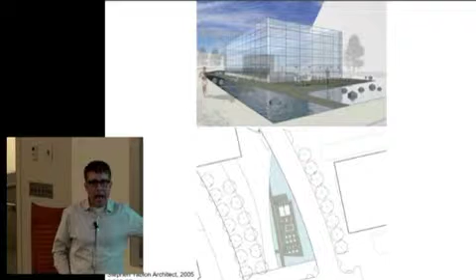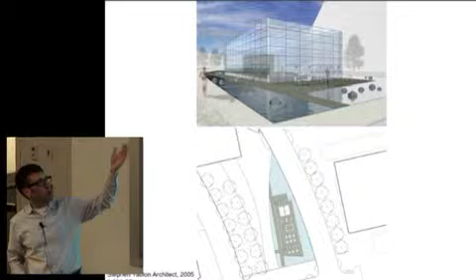That was without any client feedback—there was just a short brief and a site indicated on the Rose Kennedy Greenway. For reasons still a mystery to me—and our very own Peter Wiederspan submitted one of the proposals back in 2005—Steve Yablon and team were chosen for this glass box, a perfect glass cube that was transparent and light, sitting on this kind of metaphorical harbor.

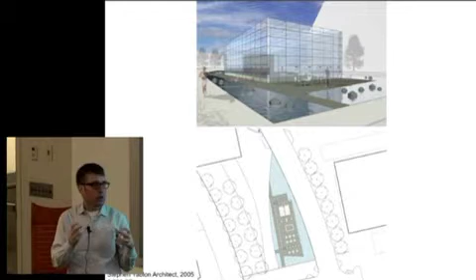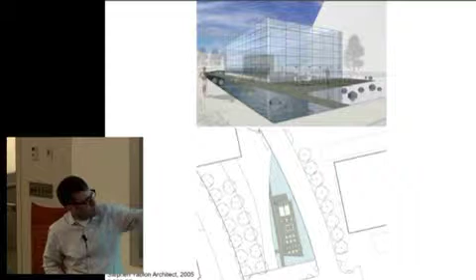In a way, it was the metaphor of going on an island to learn about the islands. Now there were a couple of problems with this. One, it would be very hard to keep the temperature in this building below 100 degrees in the summer because it's basically a greenhouse. Secondly, if you look at the floor plan, as an architect, there's room for a men's and women's bathroom and a couple of cafe tables.

So even though the image was compelling—which button do I? This one, here it is—at night it's totally cool, and it's got little TV screens.

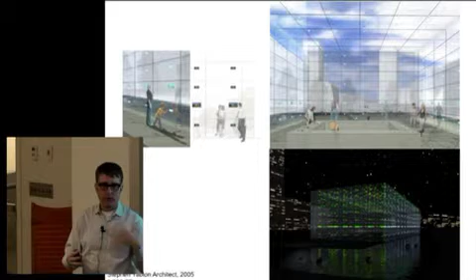It would be a beautiful thing. Because there was no involvement with stakeholders or a client, soon after architect Yablon was hired, the building changed and changed and changed to the point where nobody liked it. And unfortunately, Steve Yablon was fired because they were tired of flying him up from New York.

He was expensive, so they issued a new request for proposals to reset the whole thing. The only requirement, and it was a qualifications bid, not a design bid, was that you had to have an office within 15 miles of the site, because their only issue was they didn't want to pay for the train and airfare anymore. But they knew the process was going to be harder than they thought.

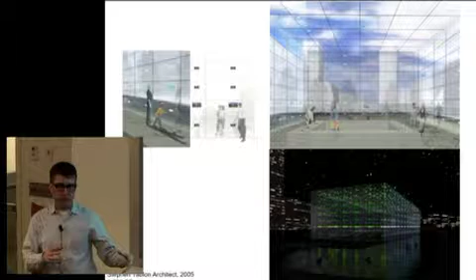So we applied as a firm, not with a design, but based on who was going to be on our team, what our qualifications were, and some observations we had about the project. We ended up being on a medium list of 27 firms, had to do a little more clarification of how we would run the job, and ended up being one of 4 finalists they interviewed.

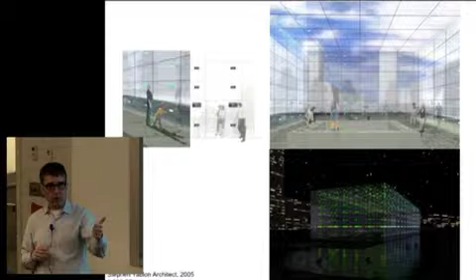The city interviewed us, the National Park Service, and the nonprofit, the Harbor Island Alliance, and then we won the project. I think we won because of my bio, because I was doing all this public agency work, and they realized what a messed up process this was going to be, since there were so many agencies that own this piece of land.

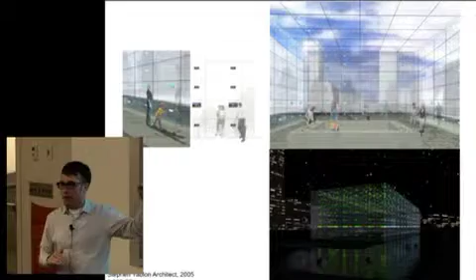It sits over the Big Dig, so the Federal Highway Administration has to approve the project. It's on the Rose Kennedy Greenway, so they have to approve it too. And the Boston Redevelopment Authority has to approve the project.

So they said, let's get the opposite of Steve Yablon from New York. Let's get Tim Love, who knows all of the public officials, so that there's a path to glory. I'm being a little cynical about myself, which is one of my default personality traits, but it's certainly one of the reasons why we got picked.

So what we proposed, which ties closely to George's theme this semester, is that rather than just be the architects and design the cool glass box, we were going to team with Reed Hilderbrand, a landscape architecture firm, to think about not just the building but the whole parcel in relationship to the Greenway, which is a park, and also IDEO, the design thinking think tank.

Have they been in here yet for your class? No, but we have people. But they could be. Continuum is here, right? No, but we've had people like that.

IDEO, for example, is doing a big project now for Sealy, the mattress company, to rethink the mattress. They were the original conceptualizers of the iPod and then the iPhone, so Steve Jobs often got them in early to think through what the new phone could be. We had some relationships with some people there.

So we said, you so screwed up your last process that we're not going to design a building for you until pretty late in the process. We're going to figure out what you want first, and then we'll design a building for you. So that was a little bit of our pitch.

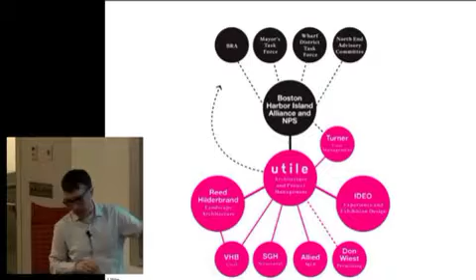So we had 3 preconceptions that we brought to the interview. One: people only go to the islands when the weather's nice, so you don't need an enclosed building, just have an open air thing, because nobody's coming to look for boat tickets when it's snowing out. The other problem with the first project was they blew the budget, and we knew if it was an open air building, we could actually meet the budget. So this was one: it should be a porch rather than a building. This is day one.

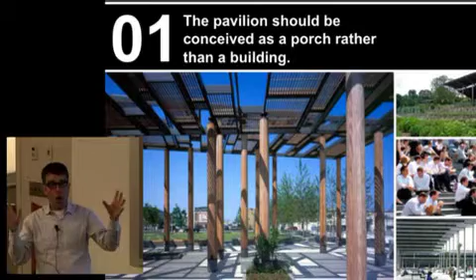Secondly, the pavilion shouldn't be an isolated thing. The Greenway had just been finished, and this thing should be part of the whole Greenway. It's a little bit Captain Obvious, but this is how you make a pitch.

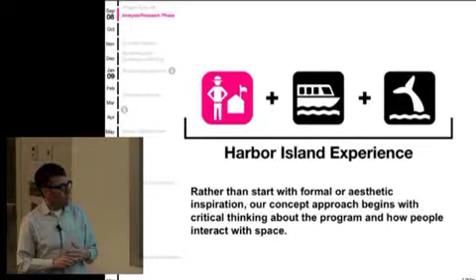And third, we were going to tie this pavilion deeply into the entire visitor experience. So before we knew what to do, we were going to go learn about what it meant to go to the islands, what was good about it, what was bad about it, before we even had an idea. So those were our 3 ideas, and rather than start with a formal or aesthetic inspiration like a glass box, we were going to think about how people were going to interact with the space, why they would come, and what benefits they could derive from it.

And the other thing that we did too, and this is a roadmap for my talk - it was back in September of 2008. These are the steps we're going to go through, and we're going to get you into construction by January 2010. I don't want to give away my talk.

We also walked through in the first meeting how we were going to do this. I'm not going to go through the steps in detail, a little too architect-y, but let's just say you design the building. First you conceptualize it, then you do the first hard drawings to get everybody to like it. Then you do design development, which is to work out what the materials are. Then you do the working drawings, which are the detailed instructions for the contractor. Then you can start building it. For a public building, that's probably a year to a year and a half minimum from start to starting construction.

So just to give you a little bit of perspective on this.

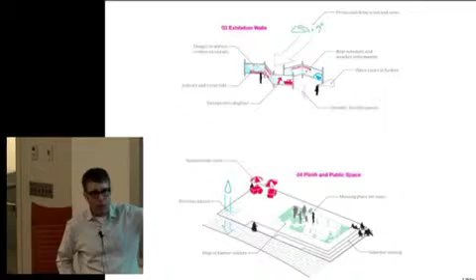The other thing that we did from the get-go is we broke apart what the possible elements would be, not in a single building, but disaggregated into some thought bubbles for the client. You're going to have a ground plane, which you need, and that could be a place where people gather. Maybe you have carts there, and maybe we do some good things for the environment. You're going to want to have display panels about the islands. Again, these are a little bit Captain Obvious, but a good way to start a project.

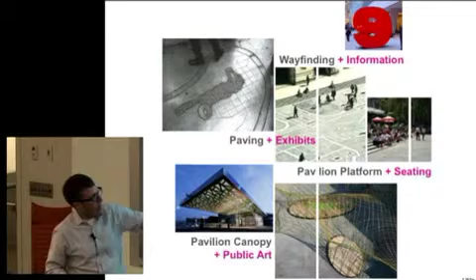We talked about how these are different. We like to use examples - we call them precedents, kind of little flavor crystals about how this thing could be. I'm a big fan of the Reese's Peanut Butter Cup analogy, which is it's going to be public art and an exhibit, or it's going to be sustainable, but also cool looking. We try to always get double duty out of everything, so this was a little bit of that story.

A little bit how we imagined the landscape around this thing was going to look. Again, getting everybody in the spirit of what we're up to.

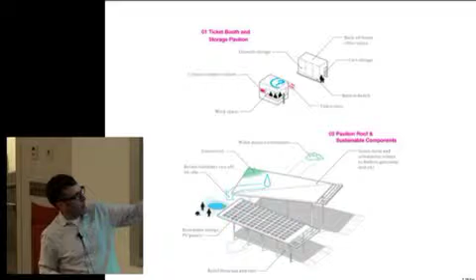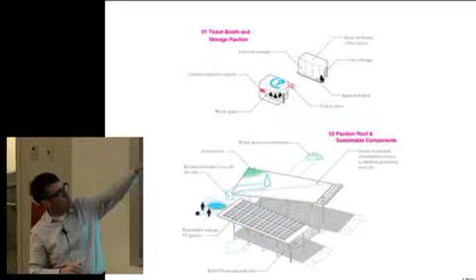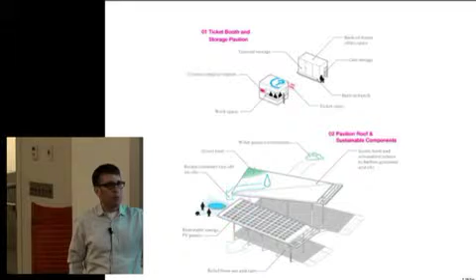And then some other kit of parts thing. Again, back to the porch idea, some performance criteria for this porch: solar panels, do something cool with the water running off, what's the most shade for people in the park. Loading up diagrammatically all of the goodness that a roof could do and getting that down immediately. And then where the park rangers would kind of do their thing. What's really weird is that this kit of parts is fully embedded in the final building. And what's interesting about it is that you can't really argue with these. It's a little bit like you can't say, no, Tim, I don't think there should be PVs on a roof. Of course there should. So it's a little bit that logic.

We even started to think about how tall these things should be really early on. I have the dates of all the stuff I'm showing you down here if you want to keep track.

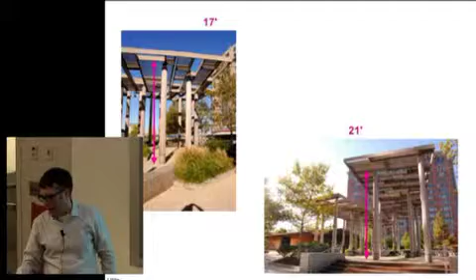So then what we did is we worked with IDEO intensively for a month and a half. They're pretty fun because they're even more design thinking than we are - they're cool, they have even bigger glasses than I do. We went on two field trips just before the season was over to the islands, interviewed people, made little videos, and had this whole big workshop in their offices.

We broke down the visitor sequence into these four categories - I'm not going to go into detail. We had photographs of all of those different steps of the sequence, and we learned all kinds of interesting things that we were able to bring back to the pavilion.

One of the things that we learned, which was totally hilarious - you're probably all too young to remember Gilligan's Island, the show about the shipwreck, the three-hour tour. Well, everyone's terrified they're going to miss the last boat if they go to the islands. It's the don't-abandon-me-out-there syndrome. So we learned all kinds of interesting psychological things about the islands.

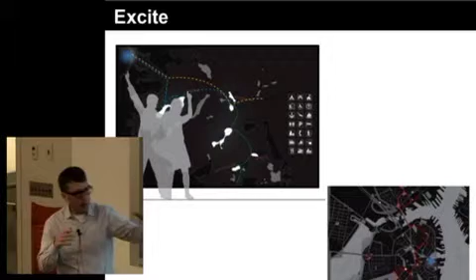The park rangers could mark up blueberries in season, nesting terns, all the things that they like to do on one big map panel, and a big map of the city on the other. So we took the kit of parts and we expanded them through this process.

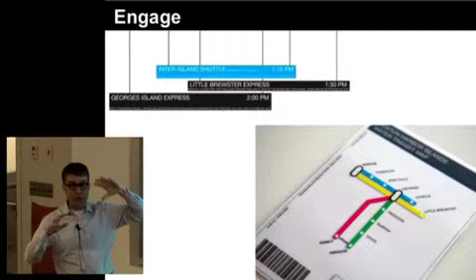Secondly, we were going to have, right on the pavilion, when the next boat was leaving, immediate satisfaction, because the schedule is still a disaster. And we were going to redesign the route map like the subway map so that there was no mystery about it.

Then we would color code the LED readout to the boat so you knew what to do, and color code the tickets out of the ticket kiosk. We put the islands that you were going to on the tickets, and the boat going on that route would fly a flag of that color. Like we said, how do we demystify the whole process?

And then in the retail store, we dealt with all the psychological terrors out there. So we have snake venom in here, a flashlight, and one of the silver ponchos, just in case you're left behind. It was a little tongue-in-cheek, to get the national park guys laughing, which is very hard—they don't laugh much, they're very serious.

And we'd have a way, when you're on the islands, to take your own bird tour and things like that. So we wrapped this whole thing around a set of strategies that partly had ramifications for the pavilion, and partly were recommendations to the Harbor Alliance and the National Park Service on how to do their job better.

We were also very interested in the idea that when you got out there, you'd see the same reassuring LED signs—there's your nice green flag. And on the boat ride back, which is a great boat ride, there'd even be exhibits on the boat so you could understand Boston on your way back. So that was the IDEO process, and it was fantastic.

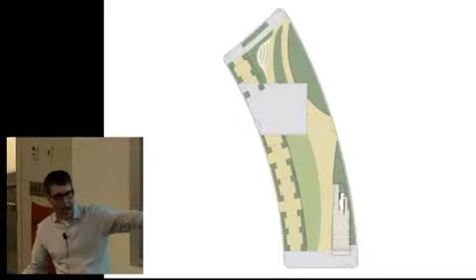So we had this whole cockamamie process to put the pavilion where it wanted to be. I'll show you quickly—that's where Steve Yablin wanted it. That's our early scheme, we did a little perspective study of where it was, and a little analysis to show that yes, it was close to the aquarium access, but it wasn't near the boats.

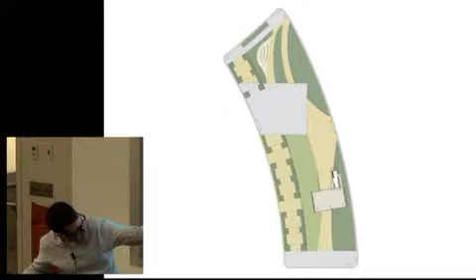We tried one in the middle, creeping up the parcel—again, this is State Street at the bottom, Quincy Market coming out of the top. We did a little perspective study and kind of discredited it in terms of its location. And then we got it where we wanted it.

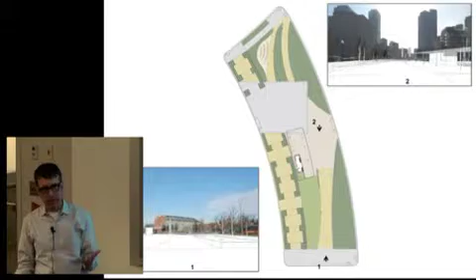Apples to apples is always a way to test things, but also if you're already pretty sure and you need to persuade, it's very successful to tee these things up against each other. And we said, look, you can see Christopher Columbus Park, you're actually catching people walking to the boats, and made a case that this was the best site.

So that was happening at the same time we were doing all this brainstorming with IDEO. And we were able to then bring the site choice and this kit of parts together to start designing the building.

So those were the options that we teed up to get ratified. This is November now, about a month and a half after we've been hired to get this ratified. The next step was then to try it on the site that was approved.

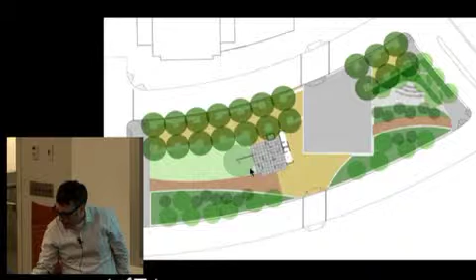Unfortunately the plans are turned, so the water is below. This is the crosswalk to Quincy Market, which is up here, so people are coming this way. This is all existing paving, and then the water is that way.

We then did a series of schemes with the kit of parts we'd worked out with IDEO, including a map on the floor, which was one of them too. So this one was kind of simple.

Simple. Any architects here? This was our Barcelona Pavilion scheme, right? You recognize it? That was our famous building, 1929, by one of the masters of modern architecture. We were riffing off of that.

George, I need your password. Not to worry, not to worry. It's a closely guarded national secret. Yeah.

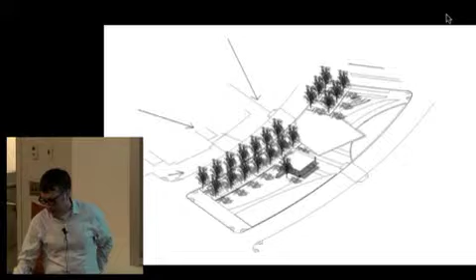So this was one option that we tried. Again, floor plan, the size of the map.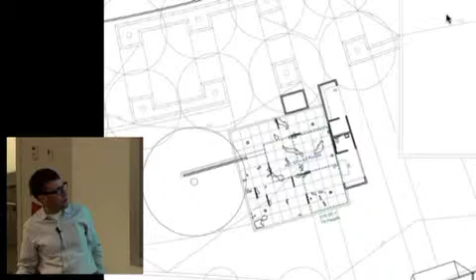This is now a digital model without the roof to show. These are now the exhibit panels for the islands that came out of the IDO process as a recommendation. The pavilions for storage and for the park rangers, and then testing how many people fit, and then the roof. There it is. And then we tested this in perspective to see what it would look like. We're already immediately doing a perceptual performance test to understand how transparent it is through.

Okay, a longer, thinner one with a canopy going in one direction. I'm not going to go through these in detail. Same set of drawings, again apples to apples. The maps caught between these two kiosks.

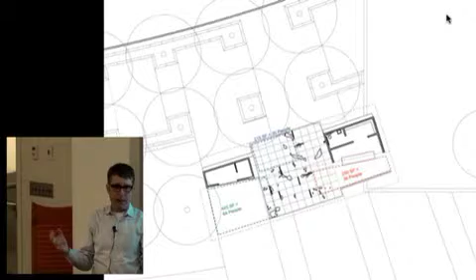Testing how many people could gather, because the park rangers are very interested. If enough people show up, and if you go now, you can see this happening live, at least when the weather's good. When they capture 5 to 10 people, they gather them around with their Smokey the Bear hats on. So they gave us some sizes to work with.

Again here's a digital model with the roof removed. Those are the food carts, the little carts there. There's the roof, the roof coverage over, that's the shade, kind of where the shade would be. And then testing these in perspective.

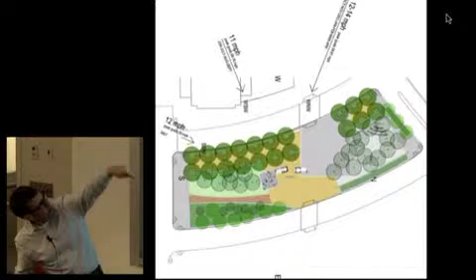And then the double canopy. We thought that roof is awfully big looking. Let's crack it, and then it could be a little bit more casual and more parky looking. And so, prevailing winds - it also had some benefits in terms of protecting from the wind coming from the upper right there, with the double roofs.

We broke it into 2 different kiosks. We moved the map so that it actually faced the big lawn. We tested the map. There it is.

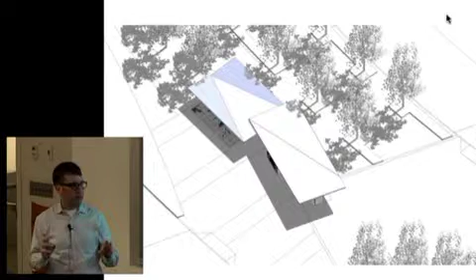And there it is. Now what's bizarre about this to me, when I went through the old material a couple of days ago, is that this is pretty much what the project is. If you go there today, it's a little bit sexier looking and things have moved a little bit. But I was shocked to learn that only 3 months after getting hired, or even 2.5 months, the diagram for the structure and even the parts were pretty much in place.

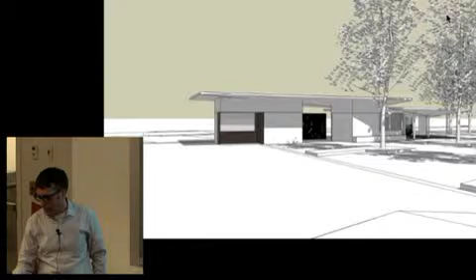It's what is called - it's a little bit pretentious - the parti, which is a long story I can't tell, but it's the scheme, it's the diagram. This is called concept design. And then what happened was - I'm going to go through this quickly, these are the perspectives - this was ratified.

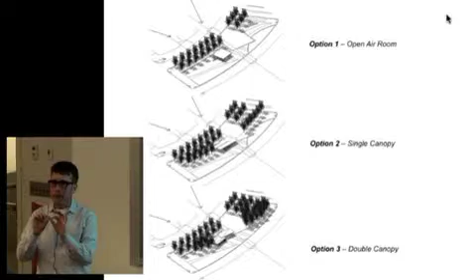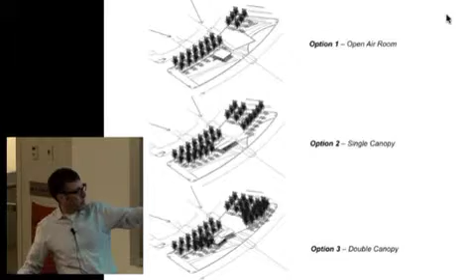So there was that lag of persuasion and consensus building, we call it, that was required. We also shared some photographs of how we were imagining the pavilion would look through. We also proposed trees that weren't on the parcel to begin with, and we proposed that we wanted you to see this thing through a grove of trees.

A woman in the audience raised her hand and said, 'Oh, I know, it's supposed to look like two seagulls in flight.' I kind of saw it when she said it, but it seemed a little tacky to me. I said, well, I'm happy that you read that into it, because we like to design buildings that are figurative enough that people make their own stories about them, but it's not meant to be literally seagulls. She said, okay fine, but I see seagulls. I said, two seagull-like.

We became very aware that if you make a shapely thing, people want to name it. My position is that you don't want to literally make a building that looks like a duck. You want to make a building that invites interpretation, but the broadest range of interpretations possible, which is the opposite of the Statue of Liberty a little bit, I guess. I'll come back to this issue in a minute.

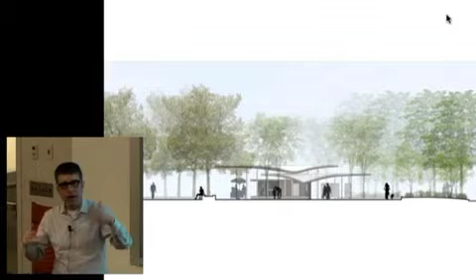I've also been teaching a course at Northeastern for 11 years on architectural topics, and one of the lectures I give is on roofs, on creative roofs. So that I was finally going to have a chance to design a totally whacked out roof was really exciting to me, because once you disengage a roof from the walls, you can almost do anything you want. You don't have to worry about insulation.

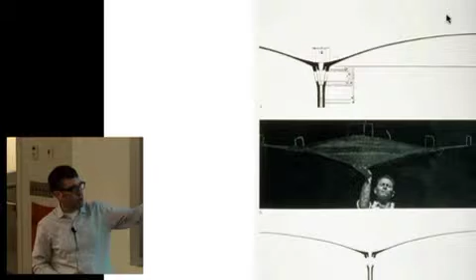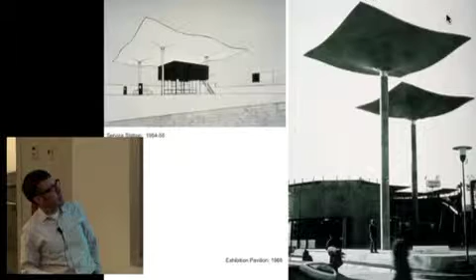This is just one of the buildings I show in my lecture on the roof: this thin shell concrete structure, a prototype designed by Amancio Williams, an important Argentinian architect, holding up the rebar. This is what that roof looks like. As an architect, if you're a hobbyist like I am, you live with daydreams of possible moves for the future. So this became, for me, a roof project, quite literally. We didn't copy this roof, but I've always been jealous of it.

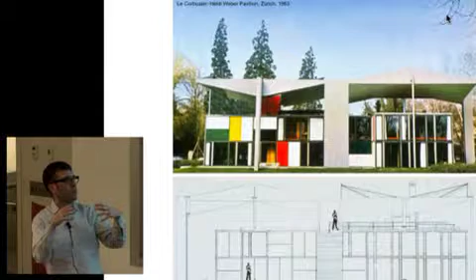The other thing I thought of immediately with two roofs is another important work of modern architecture: the Heidi Weber Pavilion by Le Corbusier in Zurich, which has two roofs that are different and the same. In Corbusier's terms, they were meant to operate kind of a logo shape that you would see from the lake. So the other idea about the two roofs for me was that we would deal with a kind of structural purity, but also that they would be iconic enough, not literally seagulls, to have a kind of presence in the park.

Back to the theme of the roofs: the next step was to get the map size right, to actually figure out how big the panels were, to begin to get the pieces of the pavilion. We're now in March, doing the first perspectives to figure out the structure.

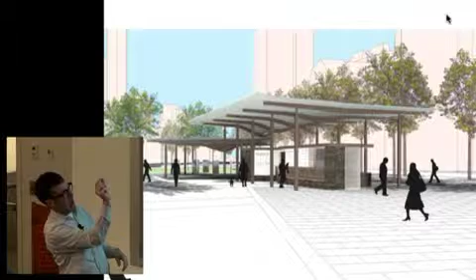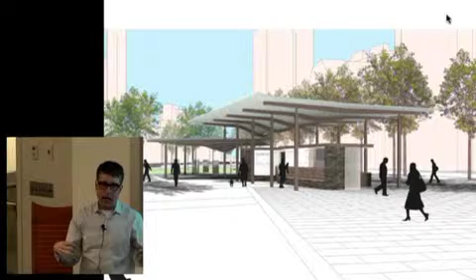In March, we figured out for the first time that this was going to be a composite structure, thin shell concrete but with steel beams below, sandwiched around the little column capitals and running across. We were going to dip the roof so the upper roof drained water to the lower roof, and the lower roof drained into a cistern. That concept was going to drive the form making of the roof. This is very close to what the pavilion looks like, but it all happened around March.

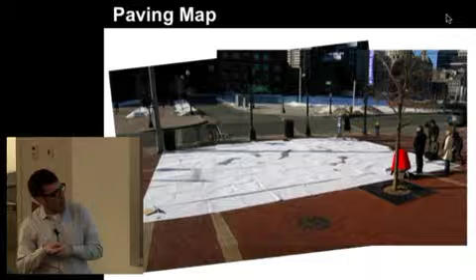I'm moving very fast. We were very paranoid about how big the map would be, so we literally printed it out and took it to Rowes Wharf one day in 30-mile-an-hour gale winds with the clients and the park rangers, who walked around on our paper map to make sure, and we got them to sign it. It's a little bit like, I'm sure you're also too young to have seen Spinal Tap, the movie, where they got the scale of the stage wrong. So we wanted everyone to get a sense of the scale of the whole thing by doing a mock-up.

And then we went to town and we designed this thing. So those are the original ideas, and that's where they ended up in the plan.

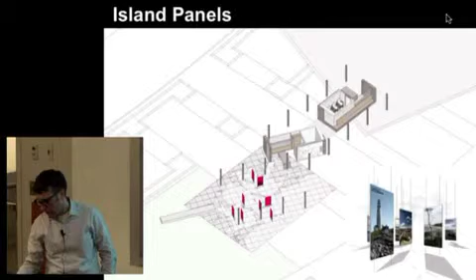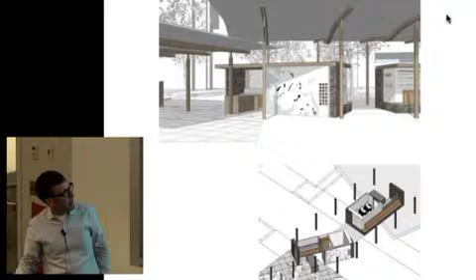You can see them there. They open and close—that's actually an animation, believe it or not. The ticket kiosks ended up embedding in the back of the kiosks. The LED panels ended up going in.

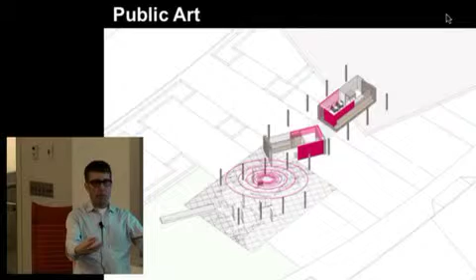Et cetera, et cetera—the PVs ended up going on the roof, not this technology, a different one. And when the map panels close, LED art screens, which were part of the original concept, were also implemented. So this is proof of concept here, where things are starting to drop in.

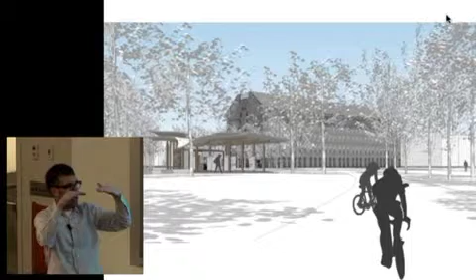These are the bridge drawings between the original brainstorming and then moving into design development and construction documents. This is the first time we accurately drew to-scale digital models with the actual city behind, to begin to register with some key historical buildings, the foreground-background thing.

And that helped us make material choices too. So this was all very key here—these perspectives, how it was actually going to look from eye level.

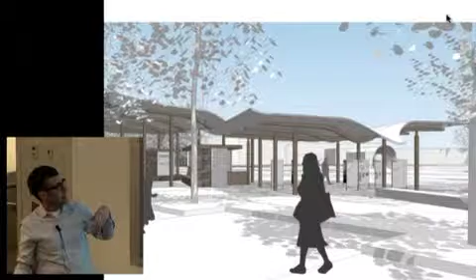Coming out of Quincy Market, it's the first cousin of the existing pergola in Christopher Columbus Park. And then working the other way towards Quincy Market too. So we used perspectives to finally fix everything in plan.

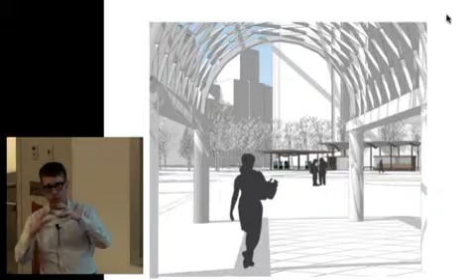And then it even terminates the view from the pergola that runs to the North End, if you've been through that. And there you have it—this is the water coming off the back.

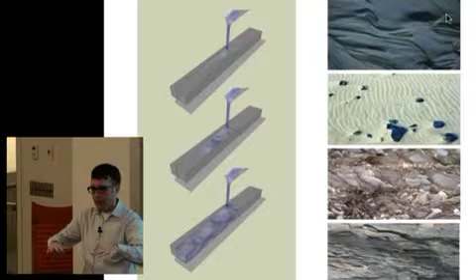So moving ahead here, we had all kinds of options for where the water was going to land. Gary Hilderbrand, the landscaper we worked with, he's more of a metaphor guy than I am. Like, I hate seagulls—he's like, it's going to go into a thing that's shaped like the erosion of a beach. I'm like, okay Gary, as long as it looks cool and I like it, you can deploy all the metaphors you like.

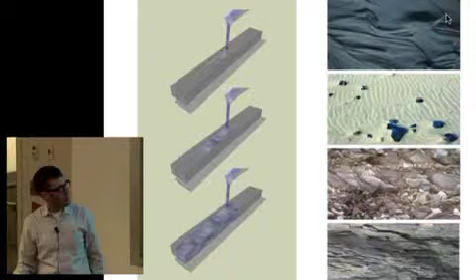And then we started to test the lighting digitally too, the uplighting at night.

And then, just before we went into working drawings, we had an inspiration, because we were working with a structural engineer and wanted to get the concrete slab as thin as possible. He said it's going to be 6 inches, it can't be any thinner. I said, what if we split the beams in the middle?

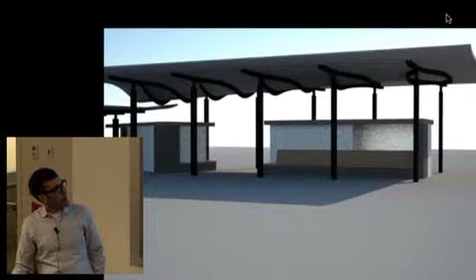You see that? It's pretty cool. Wait, let me go back. Because splitting the beams, like fettuccine, more evenly distributes the load in the middle of the span of the roof, which means we were able to take 2 inches off of the concrete roof. And it just looks cooler, because your eye can better map the contours of the roof now—that's almost like a contour drawing in landscape architecture.

And so we did—these are very rough, but we did the Split the Fettuccine series. SGH, the structural engineer, ran the numbers, and there you go, did that. We wanted it so badly we did a million views—we got to split the fettuccine.

And so this brings us to this key moment, May—we started in October, and by May 2009 we had been to see all these people, at least. This is just a snapshot of all the meetings we had. We had to see the Friends of Christopher Park, Greenway, Better City, abutters, Boston City Design Commission, Greenway.

These are the remaining hurdles to full approval—this thing's all designed, by the way. Meeting with Mayor Menino, that was fun, he was in better health back then. And then the design development budget came in, and we were on budget.

The budget was $4.5 million. So there was lots of happiness. And then there was—I'm not going to get into that—but it's very interesting because we predicted when we started that we'd be here in May, and it was in May. So I'm just letting you know how this thing works.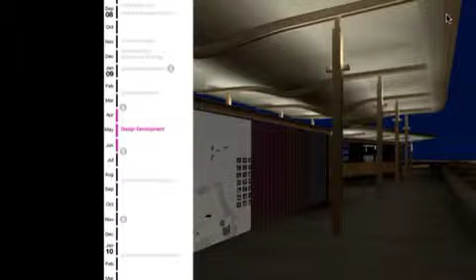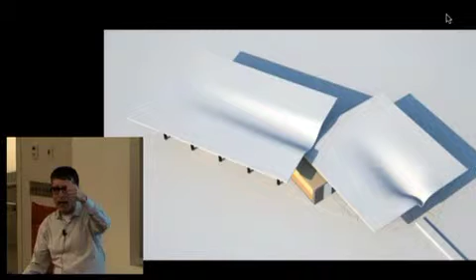And then we had one last design idea before it was time to go for it, which is that in the drawings I showed with the split fettuccine, we were working with a hydraulic engineer to get the pucker at the end to make the water flow nice. We were trying to design the flow of water like a nice Scandinavian pitcher, right, that you'd buy in a mid-century modern thrift store.

And he said, pucker it up more. So we puckered it up. And then he said, if it's on the same axis as the upper roof, I can predict the water.

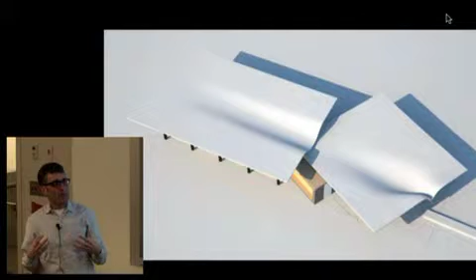I don't know what the water's going to do when it's like this. It's going to swirl around up there and spit off the edge. We said that's actually cooler because it means these things, even though they're unrelated, actually have a secret relationship, the axis of the curves. We asked the structural engineer if we could fabricate this. He said it's going to be harder, but we can do it.

So we had this other series, the Twist the Back Roof series. You see that? In case you missed it, we thought it was like a tongue, but that was a disaster. Water went everywhere, and everybody was going to get wet. Then we had the pucker, and then we had the pucker and the twist.

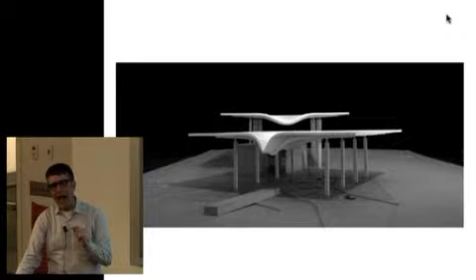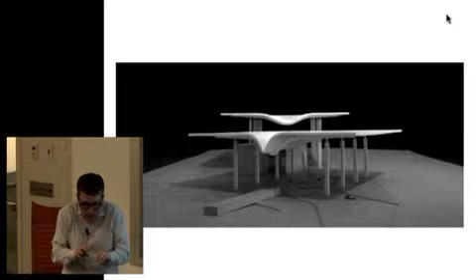Then we made a physical model of it, because the hydrology engineer said the only way you're going to know, since the computer models weren't enough, is to make a physical model and run BBs, little metal balls, down the roof. So we made a physical model, and we actually had fun running BBs down the roof, and they would swirl around. I should make an animation of that.

There's the model we made. It's about as big as that table, and that's the view from the top of this very beautiful little crease that ties the two roofs together. It wasn't a seagull — the beauty of it is that nobody saw a seagull ever again. But I'll tell you a funny story, people saw other animals, but I'll save that for later.

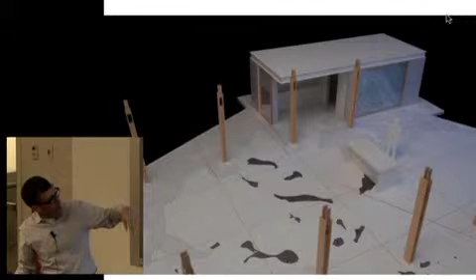Then we had to work out finally the grid of the granite of the map, where the columns would penetrate, and how the map was going to slide into the ranger station. So we had to make a big physical model to finally nail down the actual specifications for the floor. You can see the little pinch detail for the fettuccine roofs there.

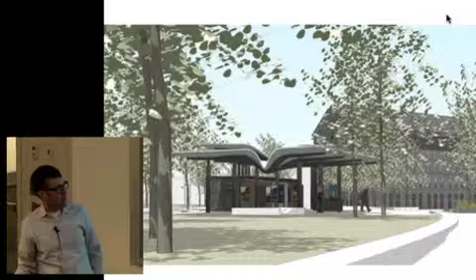Then we did the final design. We did a final run of perspective renderings, just the way it pretty much is today, as a final verification. Construction then.

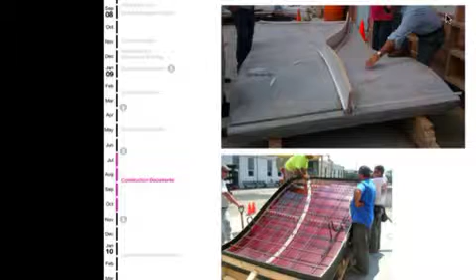By August, they actually didn't know how to build this thing. We worked with the contractor all the way through. The question was, how do we integrate the steel and the concrete? So this is a mock-up that was done at SGH's offices up in Woburn.

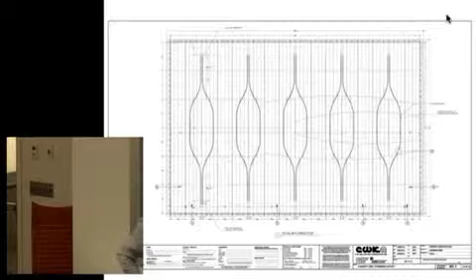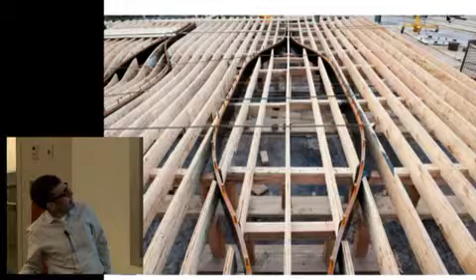If they didn't exist, we wouldn't have been able to build this thing. So what you're seeing here are formwork ribs, every foot on center, tying into the structure, and it's actually a 3D shop drawing. These are the instructions for the robots to laser cut the ribs, put the plywood on, and pour the concrete. Here are the ribs in place. Each of these is custom cut from the computer model, but it doesn't matter — the robot doesn't complain about how hard it is, it just does what it's told.

Separately, the steel was cut by a laser cutter and then bent in a computer jig, and those are the pins so the steel can go up into the concrete. There it is then. Now there was a little sagging once it was poured, and there was a bit of a panic attack. So until the concrete was totally cured, we put up these braces, and everybody's like, 'Oh, they made it too thin,' but it's fine now.

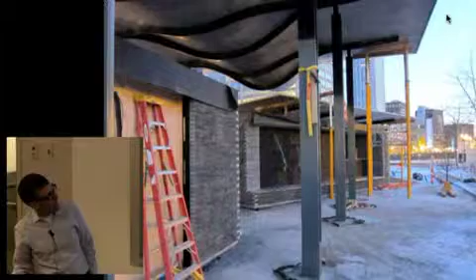This is January 2011. I just want to make a point here — I think you can see the fettuccine steel now up in the concrete.

What's really interesting is that you see where there aren't any grid lines. This is the lower roof now. In this section, the computer model said, at that point, you can't bend plywood anymore. So everywhere where there's a grid, because you can actually plug in quarter-inch plywood in the computer model, it can't bend more than curve X. The computer model says it works here, and then it doesn't work here. In that case, we had to build...

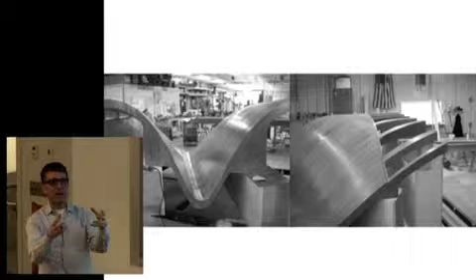So here's the roof looking toward the snout. You can see that the ribs end there at the end. We had to build a solid state piece of formwork, an actual solid chunk to plug into that, whereas otherwise on the rest of it, we could bend plywood on top.

So that's right after the pour. You can see they're working in that direction. We did four on-site mock-ups before they got it right, because pouring concrete at a 60-degree slope...

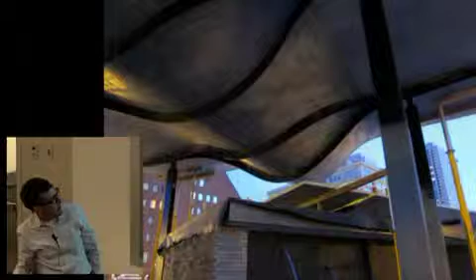It's craft, it's unbelievable. That's it, almost opening there. Trees are going in. Very cool moments where the two roofs come together. There it is in the winter, and then there it is finished.

Oh, so one last story. I'm doing fine with time. Oh, you're fine.

When we started drawing the perspectives, we had dealt with the seagull issue effectively. I should have told the story a little bit earlier. Back when we had the single beams, a different woman at the next public meeting raised her hand and said, 'I know, it's the bones of a whale.' And I gave the same speech, saying I'm glad you've interpreted it that way, but it's meant to be open to many interpretations. I gave the exact same speech. And she said, fine, but it's the bones of a whale.

So when we then opened the beams up, at the next public meeting, I kid you not, a third person raised their hand and said, 'I know, it's the structure of a boat.' So I guess my answer is it's the bones of a whale, it's the structure of a boat, or it's a seagull, it's two seagulls, it's whatever you want.

So I think that might be it, George. Okay. Fantastic, thank you.

Do we sit here? You join us over here. Across from each other? Yeah. It's like it's Pat and Richard Nixon. Or I was going to say Boris Spassky and Bobby Fischer. I see, the World Chess Championships.